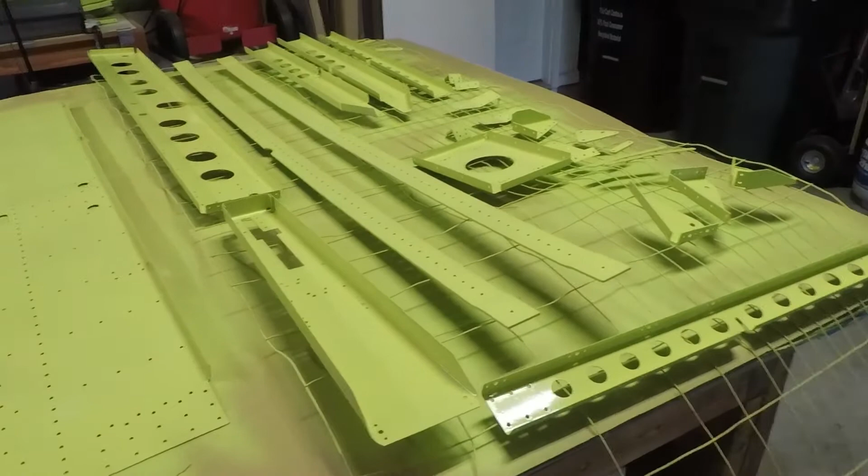What I did today was get out here and get all the parts primed, but you'll notice there are some extra parts here. That's because I did start on the fuselage bulkheads, which I'll show you guys in just a moment.

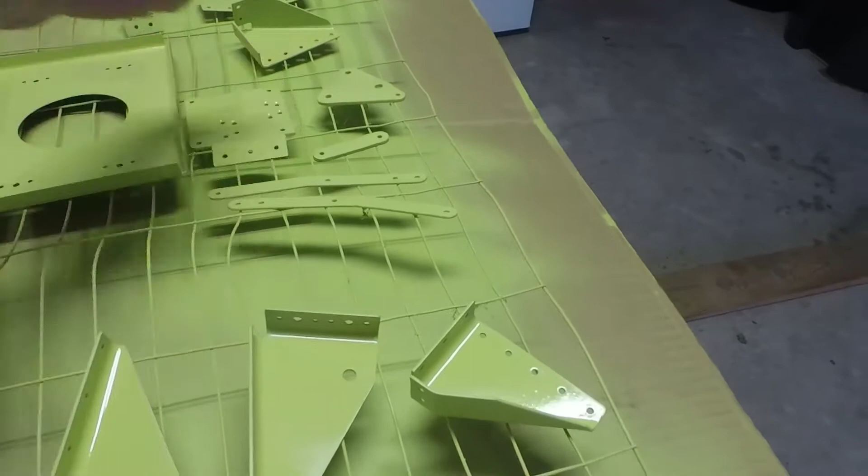This is that trim bracket that we saw, and a few of these other parts over here belong to that. These guys do. However, this one here, this here, those up there, those are all part of the mid-fuselage bulkheads, which I'll show you guys on the plans here. It's this one and this one.

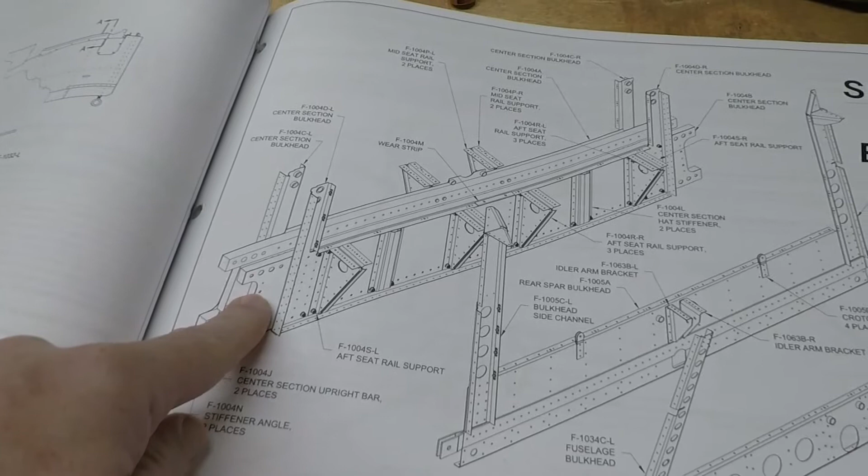This one here, I need to wait until I get the wing kit, which I'm probably going to get sometime mid to latter March, maybe beginning of April at the latest, because that piece actually ships with the wing kit. All these other little pieces ship with the fuselage kit, which I have, but I don't have the wing kit. So I can get these done, and I can get a couple more steps beyond that.

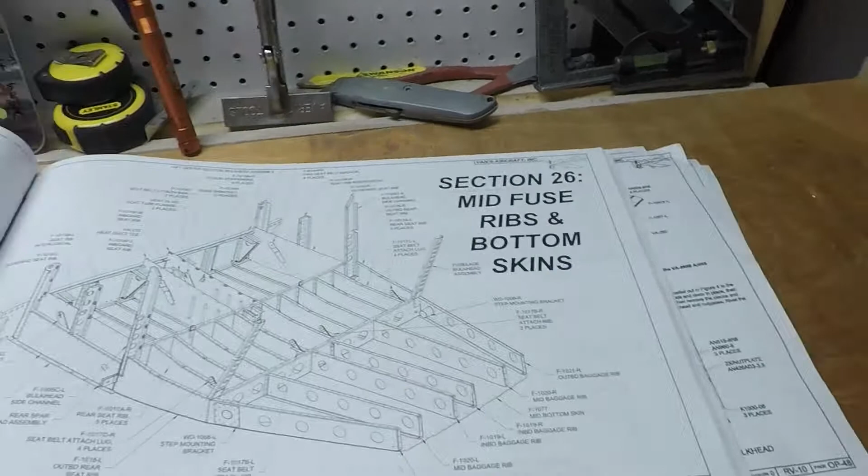So I can get pretty much all of this done with the exception of this attachment here, and I've still got plenty of space to work there, so that's not a big deal. So I do have stuff to do.

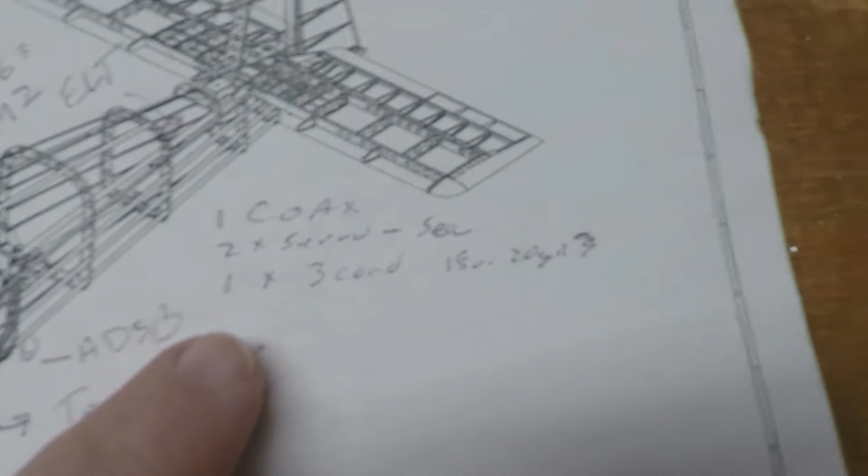Also, I wanted to show you guys here my antenna layout stuff. You guys have heard me talking about this a little bit. So up here, the VOR antenna, and that was just me making some scribble notes. ADS-B antenna, transponder antenna, the GPS 2 and comm antenna, which is a combination antenna, here on top. The ELT, or emergency locator transmitter antenna, will be up here.

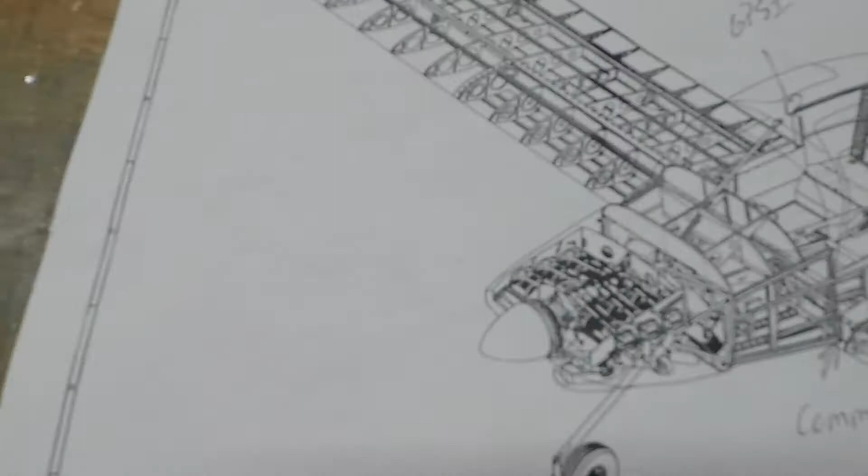GPS 1 will be on top of the cabin top, which, yeah, we're working on that. COM 1 will be somewhere underneath the belly here. And nav 2, question if I'm even going to install it—probably, so it's probably going to be out here on the wingtip.

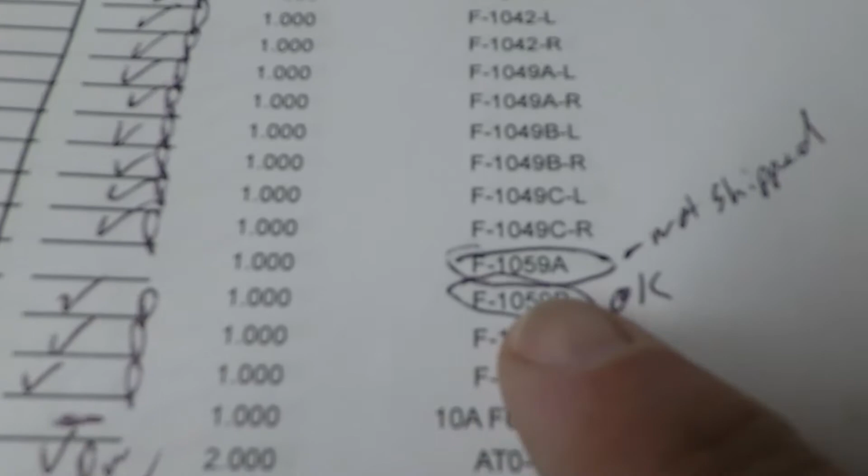Also, since I got to start working on the fuselage bulkheads and had to tear into a component, this is a check sheet that Vans gives you that says what all you're supposed to have in the kit, and it's very accurate. But I got down here to the end and it appeared as though I was missing this piece here, 1059A. Well, 1059A, I found it.

It was buried inside of these guys, right? I think it was this one here, and there's an exact match on the other end. I just sprayed these literally within the last 5 minutes on the back side here. I've already sprayed the front side, so those are ready to go, and the next time I'm working on the airplane, probably Saturday, I can start working on assembly of some of these components and work on getting the rest of the tail cone finished up.

Somebody had messaged me about my process as far as priming goes, so I'll walk through it a little bit here. This is what it looks like when it comes out of the kit, and it has the bluing material still on it.

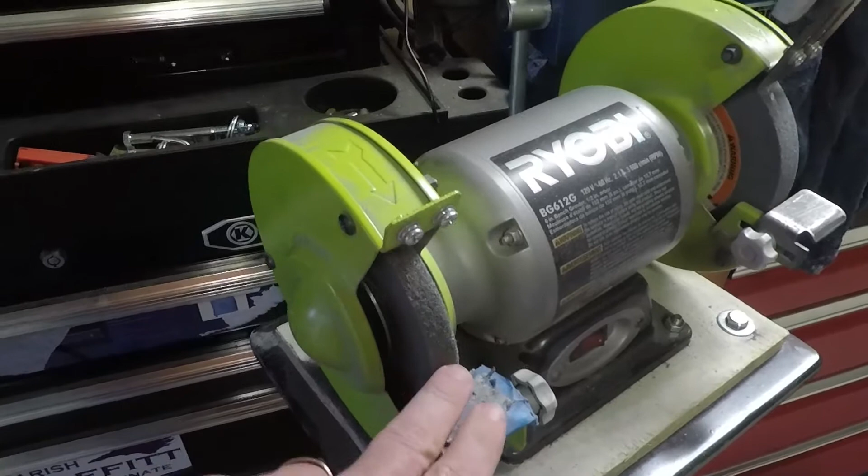The bluing comes off, and then I use a rotary Scotch-Brite wheel that I have mounted on my grinder here. Looking at this one, it's probably getting close to ready to replace, because I've eaten off a good probably inch off of this wheel, believe it or not, in the 2 years I've been using it. But anyway, I would run this up and down here and just knock off the edges, because when these are stamped, there are little grooves and little notches here from the stamping process.

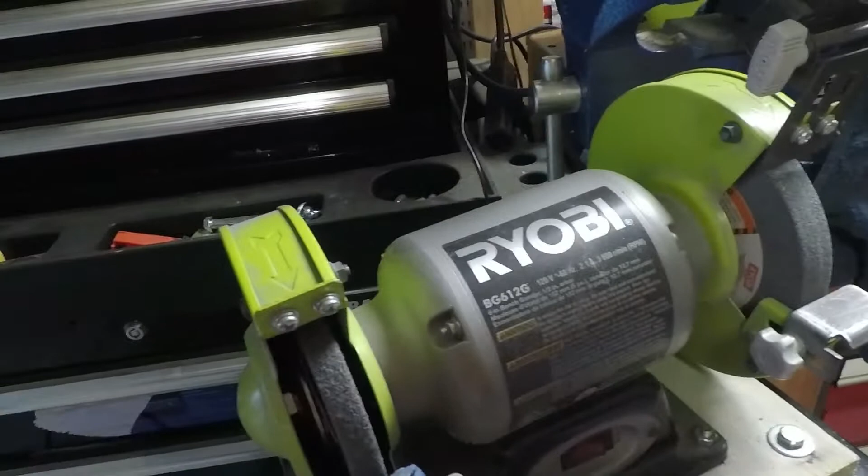So it knocks those off. Generally I go up one side and then rotate it about 45 degrees and come back, just because it'll leave a little bit of a sharp edge, and that knocks off that sharp edge.

For what I can't get to, I do have a couple of hand files. I think I got these at Home Depot or Lowe's or something like that. This one I love because it's rounded on one side, or half rounded, so I'm able to get into a lot of tight spaces with that.

And then on the big skins, I use a big file like this to knock off the burrs, because obviously I can't run a big skin. I tried it once and it makes more of a mess than anything, and I'm afraid I'm going to bend the skins. So I knock off the edges instead.

Hole deburring occurs with this tool here, and you stick it in the hole and rotate it, and so you can deburr the holes. After that's done, then I take a Scotch-Brite pad like this.

They actually come in a big sheet like so, and I bought them on Amazon, and I use these to scuff it up, and it basically takes the shine off.

You can also use it if you have any grooves or notches that happen just in the construction process, if you scratch a piece or something like that. So I use a Scotch-Brite pad to get the grooves out, and you get in there with it and you'll be amazed how much you can cut it down.

So after that, in here, I bought these at, I believe, Lowe's as well. And what they are is they're made for underbed clothes storage, but they work great for this process.